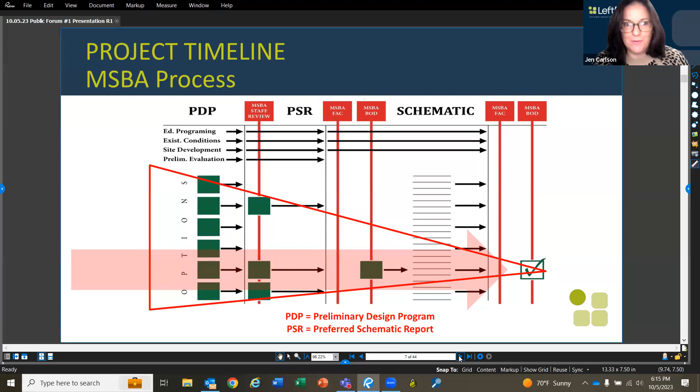Again, from the list of options that Carl will show you in just a moment - once we submit the PSR, once the district has chosen that singular option, we move forward into schematic design with that option, and DRA and the team works to develop that one option further. At the end of schematic design, we will have a total project budget that will be known, that will be able to go out to the towns, the communities, and explain what everyone's share will be, what the share of the MSBA will be. At the end of schematic design, we'll really know what we're asking everyone to approve as a project.

And then we'll move into the preferred schematic report. This November, December, and January, we will really be working to evaluate all of the options on the table, narrowing down enrollment and other considerations.

And spread the word, tell others to join the community forums. Along with the community forums, we will be having school building committee meetings. We have one at least once a month, and we'll probably be adding a couple more into the mix as we move forward.

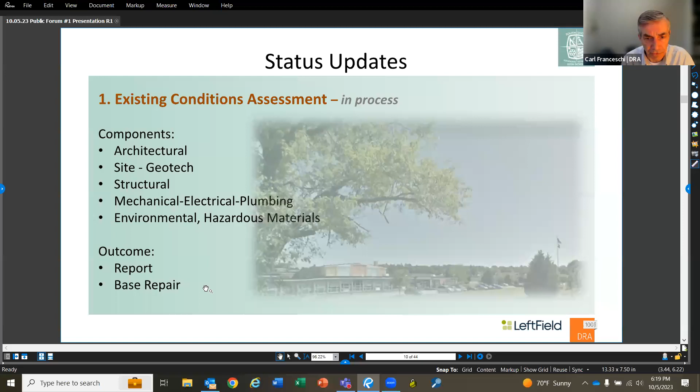So again, when we have more developed options which address the educational needs as well, the base repair gives us a good baseline for comparison.

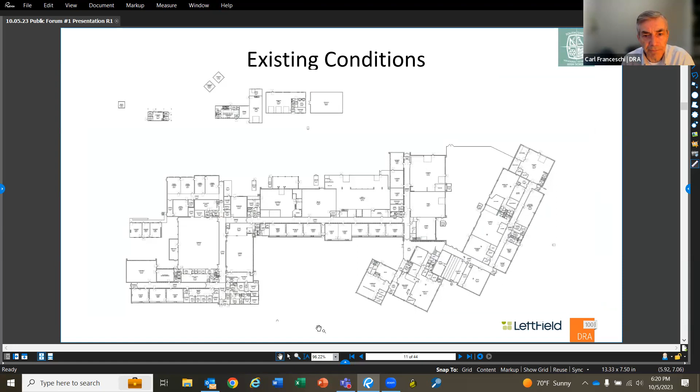So for those who aren't familiar with the building, this is a floor plan of the existing building. It is a one-story building, about 125,000 square feet. It's over 60 years old or so, and that in itself tells you a little bit about the existing conditions physically.

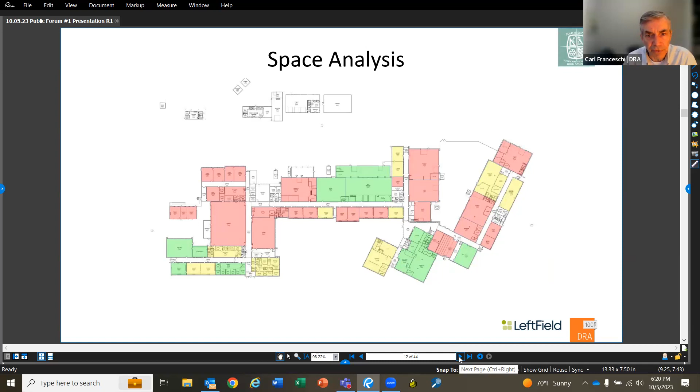Those would need to be addressed in any kind of renovation project. But we also looked at the physical conditions.

The school has done a good job trying to maintain the building over the years, but certain systems just reach a certain point in their lifespan. Also, technology has improved, and building construction has actually improved in terms of energy efficiency and tightness and so forth of those kinds of systems.

So there are certain needs that do need to be addressed. The school is still making use, for instance, of some space that was considered temporary, modular construction, with an outdoor connection — things like that need to be addressed.

And as we said, the interior mechanical and electrical systems — there have been some upgrades to the boilers, for instance, but the basic distribution system and the electrical distribution systems really need to be overhauled.

As far as life safety goes, the building does not have fire suppression sprinklers, which is a requirement for buildings of this size and type these days. That would have to be included in any renovation and so forth.

We also look at the equipment. Again, the school does get grants regularly and allocates funds for upgrading equipment, but there's still some that in a comprehensive renovation would need to be addressed.

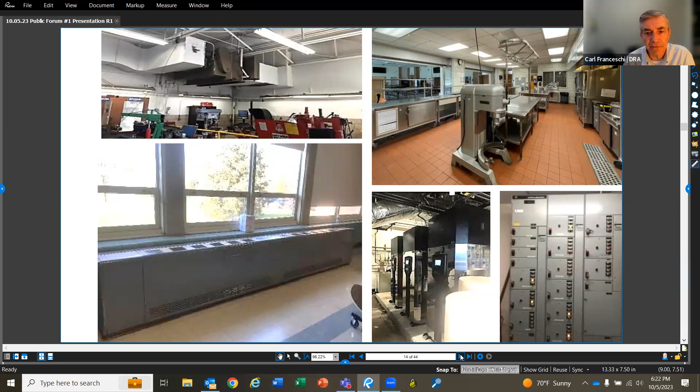The other part of this phase of the project is educational programming. That's really saying, how does the school want to teach and have learning occur in the future? Before we design anything, we spend a good amount of time thinking about and identifying a vision for the school, then trying to translate that into a qualitative and quantitative document called an educational program, and more specifically, space summaries.

So the visioning process started during the summer. We had three, two or three hour workshops with a good cross section of the school: teachers, administrators, some parents, a couple students, and the design team, with our educational consultant facilitating.

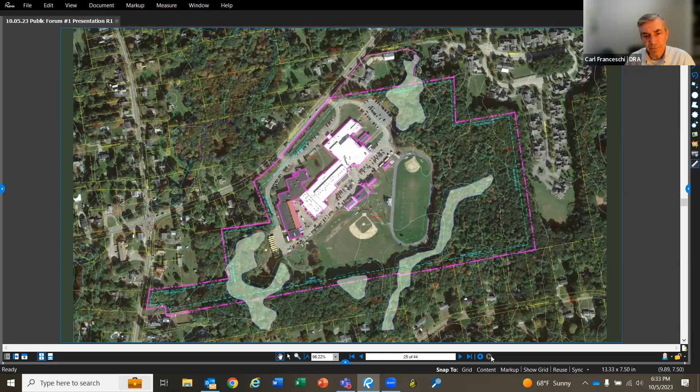When we consider options, we look at the full spectrum. We don't have a preconception that it's going to be a new school, or that it has to be an addition renovation. We look at everything from a pure renovation, but we know that in this case it's not going to satisfy even the lowest enrollment—there's not enough space within the four walls of the existing building.

So we are looking at some addition renovation options, and we are looking at new construction options. As I mentioned, just for comparative purposes, we do have that base repair identified too, just to fix deficiencies in the existing building. So in terms of how we'd add on to this school, or where we could site a new school, this diagram sums that up.

There are areas in front of the school and around the back that we think are prime for addition. Some of these other areas, even though we look at them, may be needed in conjunction, but the majority of available space is really on the north and east sides of the building, wrapping around the front there.

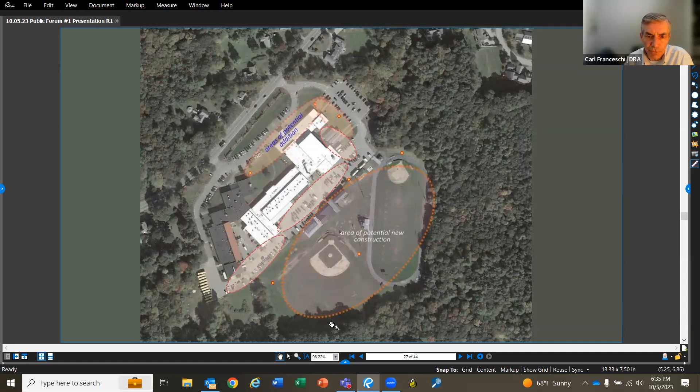In terms of new construction options, the athletic fields are really the available site. Even though there is some adjacent land the school owns, it's segregated by those wetlands. We may be able to use them, perhaps with a strategic crossing, for some parking or maybe an athletic field, but as far as the major building zones go, it really is the current athletic fields.

For the new construction options, we have three of them. We've given them names reflecting the shaping of them—one is a courtyard configuration, one's a more linear organization along a major circulation spine, and one has more wings to it. These are all multi-story buildings because we can't really fit a sprawling one-story school on those available parcels.

Clearly they're going to lose their athletic fields, but they'd still have some parking, they'd still have ability to circulate around the school for pickup and drop off and access, and the existing building could continue in use while the new school is being constructed.

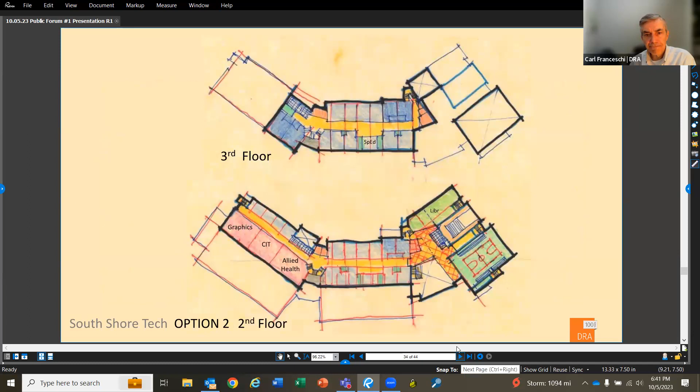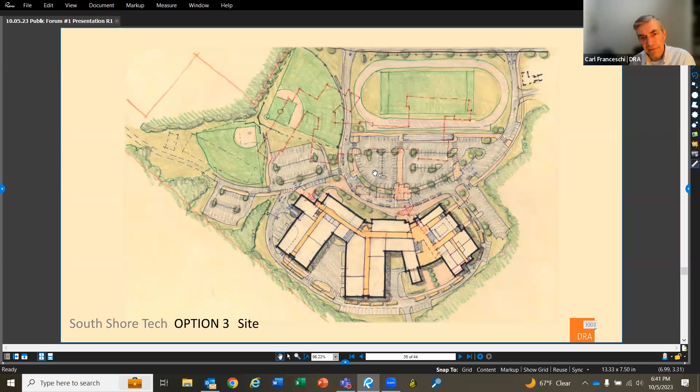The third option takes a slightly different configuration. Instead of being stretched out along one corridor, it basically has wing buildings with service areas in between those wings, but again a slightly different possibility of how to organize the access drive and athletic fields in front. Those wings are organized again in career clusters.

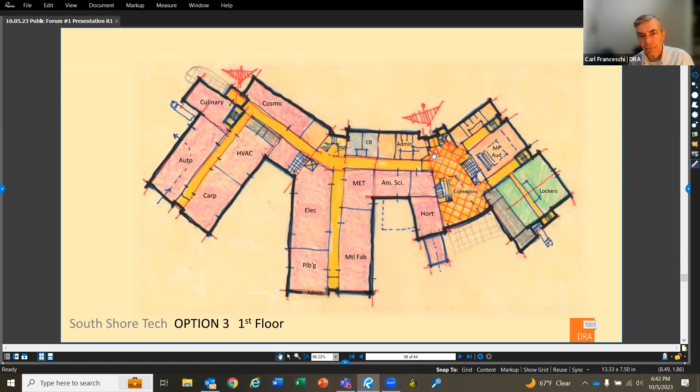Here, the construction trades may share this service area—carpentry, HVAC, electrical, plumbing—where they could use the outdoor space for collaboration, perhaps building some projects. Again, there's still a dedicated entrance for the public to access the restaurant or the salon at one end, and a major visitors entrance adjacent to administration at the other end of the building.

Here's what those upper floors would look like. Again, there'd be stacking of the low bay shops and the classrooms and science labs along this corridor, with the library more central in this option, but still the gym—trying to keep the building compact—lifted up to the second floor above the locker rooms, with dedicated stairwells immediately adjacent.

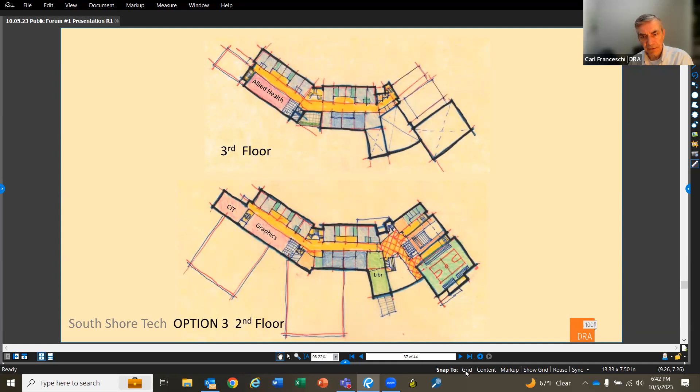For the addition renovation options, we have two primary configurations to share with you. One we call the L-shaped one, which creates a courtyard. This L-shaped bit of new construction wraps around the existing building, basically around the gym and cafeteria. It would require a bit of demolition as a first phase to create this building zone, but it gives more area for new construction and allows the school to create a new image, a new front door, while renovating the balance of the existing building on the ground floor.

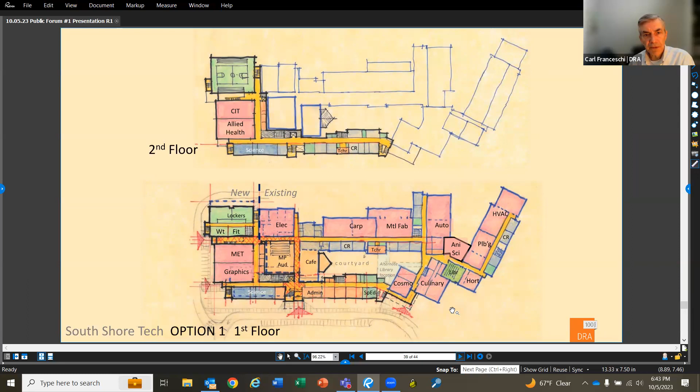And the way that would look three-dimensionally, the gray is kind of the existing building, the white is the new construction wrapping around. Again, it would vary as to exactly how big this footprint would need to be, depending on the enrollments. In some of the larger enrollments being considered, there would actually need to be additional additions, like an addition to the cafeteria, or an addition to the auto shop or the electrical shop.

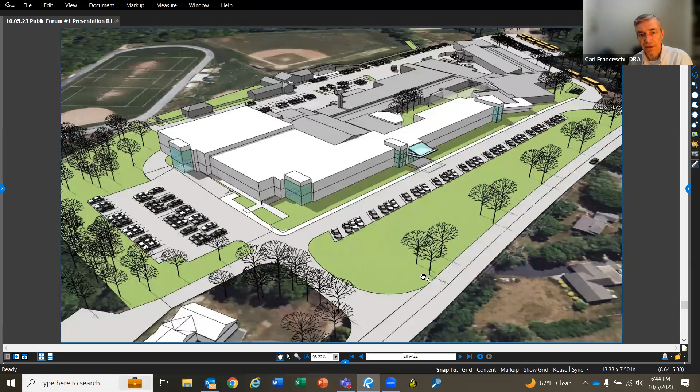In addition to this major bit of new construction, there'd be some other pieces of new construction perhaps required on the other options. And then the second addition renovation option is the one, it's still sort of L-shaped, but now kind of to the back of the building, wrapping around the existing gym, creating an outdoor light well or courtyard here to get light to some of these interior spaces.

And in this case, one of the major programmatic differences is we're keeping the existing gym, even though it's substandard in terms of size. We would renovate the locker rooms. We would build new weight room and fitness room off of it. But this is saying perhaps—

Just again to give a variety of options for the district to consider: what if we kept the existing gym? And what if we kept the existing auditorium as the multi-purpose kind of step-to-floor presentation space? It again is smaller than a new one would be. In the previous option, we were building a new gym and converting the existing gym into an auditorium.

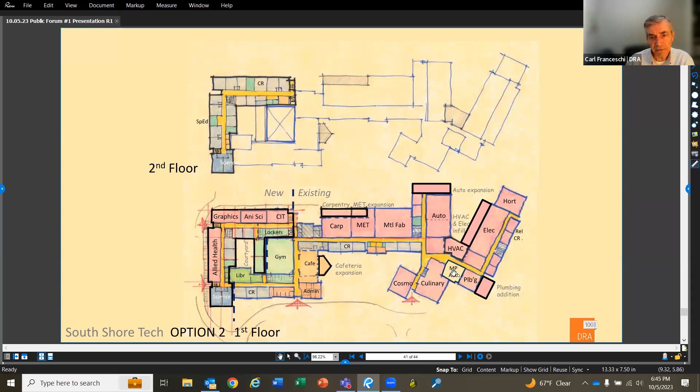So you can see the difference in size between this current space and the current gym if it were to be converted. And this option again basically keeps the existing building, the existing front door. Everything in gray would be renovated fully, like new, all new systems and so forth. And then the white area is the new construction towards the back and wrapping around the existing gym.

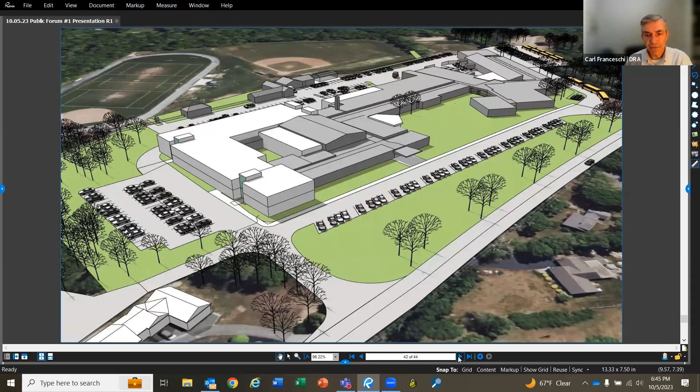So those are the options that are on the table right now and being discussed and considered with the building committee. And we certainly welcome your input too from the community aspect of this as to your thoughts going forward, because a final decision is coming in the next phase.